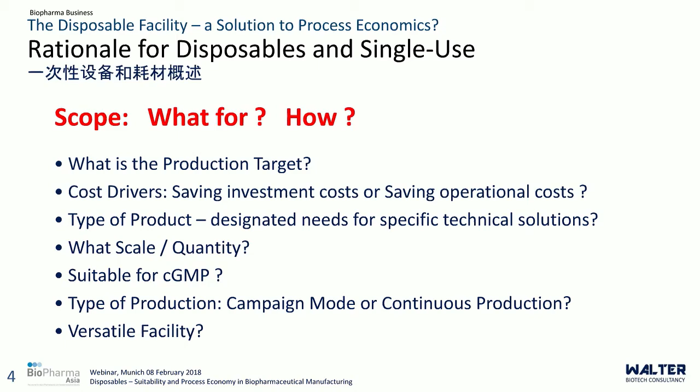This will trigger an important decision: what is the designated type of production? Shall the drug be produced in a campaign mode, or does the market volume require continuous production? Would the feasible and available scale of single-use technology allow manufacture of the requested quantity of product? Hence, is the target a versatile facility designed to allow a fast changeover from one product to the next, or is a factory of conventional style more appropriate?

Before entering the biopharmaceutical business, single-use technology was widely used in other industries already, for example in hospitals with respect to medical applications requiring comparable quality standards. So the technical premise was given from the beginning, but the general benefits from disposable single-use technologies had yet to become evident, namely in the conservative industry of pharma.

The driving force for the supply industry was the opportunity to conquer additional sites and new markets for biopharmaceutical operations, particularly cGMP campaign production of biopharmaceuticals for clinical phases. In the biopharma field, it refers to pilot plants where the advantage of single-use technology was explored, followed by companies and biotech startups which were limited in financial resources and skilled operators. This even includes universities and scientific institutions.

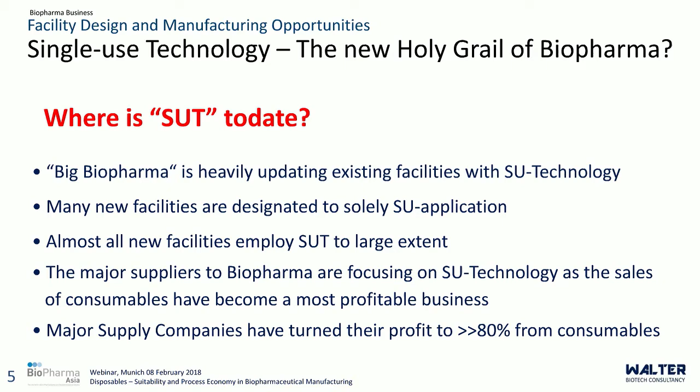The thorough evaluation of those questions is key to economy. The underutilization of a facility has a negative effect on the overall cost structure and can hardly be compensated. Such risk could be minimized with a flexible facility based on single-use technology applications, as fixed costs of a facility are very much related to size and scale. Thus, small facilities have the advantage of reduced fixed costs, for example investment, operation, and maintenance.

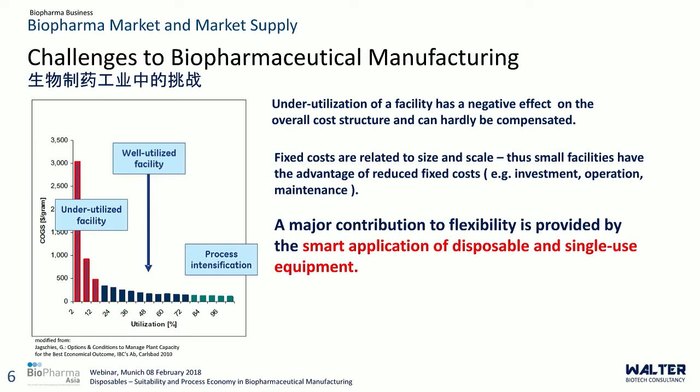This advantage, combined with improved flexibility, which should reflect the ease to adapt to new processes or operational requirements, should facilitate a reduced cost approach. A major contribution to such requested flexibility is provided by some smart applications of disposable and single-use equipment that we'll now come to.

Once a concept for the general operation of the facility in question has been established, the selection and choice of equipment has to be made.

Their footprint will define the required space, and most likely and preferably they are based on the intended manufacturing processes. How much and to what detail is the intended process defined? Which volumes need to be handled? How many tanks, containers of which volume are required? What scale of equipment to choose?

This may illustrate that in spite of process economy and commercial profit, a suitable development and design of a manufacturing process can only be as good as a management forecast for the product's market.

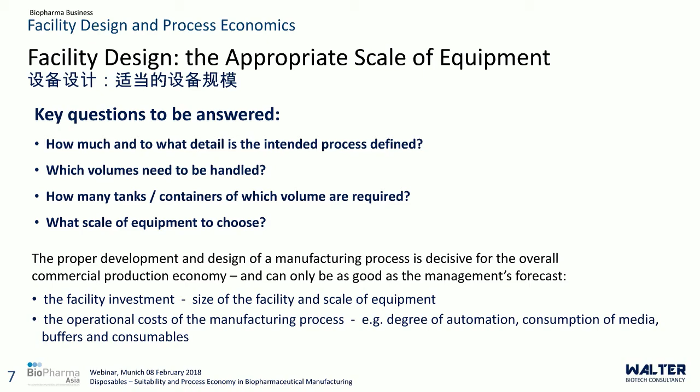After all, a tailored process design is finally decisive for the overall commercial production economy, and this with respect to both the facility investment, size of the facility and scale of equipment, and of course the operational cost of the manufacturing process. That means a degree of automation, consumption of media, buffers, and consumables.

The respective construction of a new facility for the manufacturing of a designated biopharmaceutical is not necessarily the typical situation. More typical, the intended process has to deal with an existing plant and shall fit to the existing space and equipment as much as possible.

To design and match a manufacturing process is certainly a challenge to process development, a challenge of different degree for different types of facilities. A conventional facility is typically a large facility with a majority of equipment and piping made of stainless steel.

The flexibility of such facility may be restricted, thus providing only limited options. That means due to concrete and stainless steel construction, such facility is at best reconfigurable. The processes to be operated are facility driven. That means process development has to consider from the beginning the options and the opportunities of the classic facility.

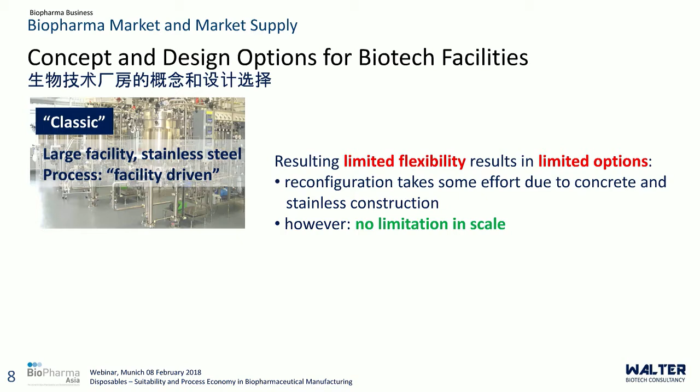Any deviation from the existing process equipment and or its configuration typically has to be supported by strong arguments, and this may lead to structurally engineered modifications which may even require a time-wise shutdown of the facility. However, to the benefit of a classical facility, there is, technically speaking, hardly any limitation in scale.

As a counterpart to the conventional facility, a flexible facility is a rather small facility, with its equipment and piping made of single-use disposable plastic polymers or in form of a hybrid plant configured in a combination of steel and plastic, where the individual parts can be replaced in a reasonable manner, thus providing superior flexibility.

The high flexibility provides nearly unlimited options. The plant will comply with variation of scale and scope of different projects and will be responsive to new challenges. Accordingly, the process is function-driven.

That means process development can focus on the target product, while the potentially required hardware and equipment can reasonably be acquired and installed. However, such facilities are limited in scale, as there are clear limitations for the respective single-use disposable equipment.

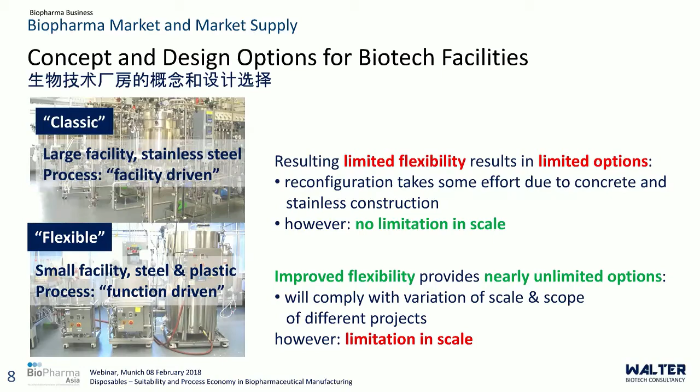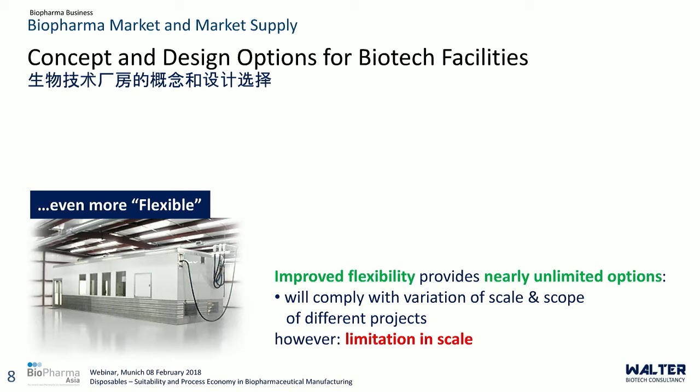The construction of low-budget containments, suitable to house and operate adequately disposables and single-use equipment, opened up biopharmaceutical manufacturing opportunities in areas and countries with limited infrastructure and engineering skills.

To date, the history of single-use technology applications is well established, and disposable consumables are available from many suppliers at fairly comparable quality. Their price has dropped due to increasing competition, though one needs to look apart from the mainstream supplier who are keen and still able to keep their high price level.

The art of single-use technology is a knowledge and experience-based ability to select disposable consumables according to the application's technical need, but not beyond. A good example may be the use of polymer bags for media and buffer preparation and storage.

The market offers, for example, sophisticated multi-layer bags with vapor barriers and single layer without vapor barriers. Both variants have their significance, and it is up to the user to decide on the appropriate application.

For example, if the medium or buffer will be consumed within a short time, thus making a vapor barrier obsolete, or if it is designated for storage.

The economy of single-use technology often suffers from a lack of detailed process cost analysis. That means missing economic analysis and cost comparison between both technologies. Therefore, again, a number of first questions have to be evaluated and answered.

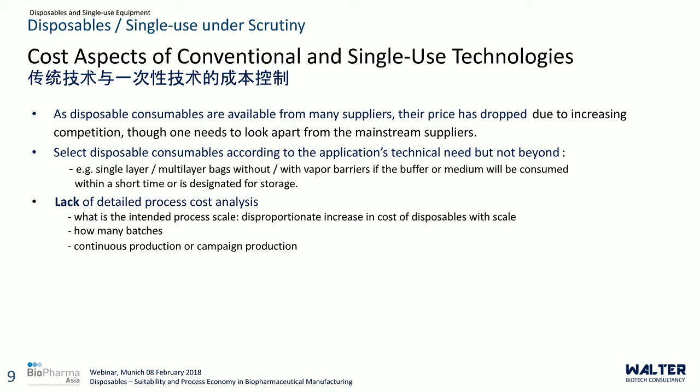Continuous production or campaign production. Is the turnover time in between change of product really time critical?

Missing economic analysis and cost comparison between both technologies. What are the real savings in initial investment? What are the cost savings in reduced cleaning validation? What are the costs related to testing of disposables for product compatibility?

Polymers are suspicious regarding leachables and extractables. Despite intense and thorough testing by the supplier, the individual process solutions need to be tested accordingly, raising the question of what are the costs related to testing of disposables for product compatibility.

A significant economic risk is underestimating the cost of long-term dependency on consumables once the decision has been made to solely rely on disposables and single-use technology. The selection of single-use technology shall be performed in an extremely thorough manner. Neglecting the dependence on a single supplier once single-use equipment has been purchased definitely can be fatal.

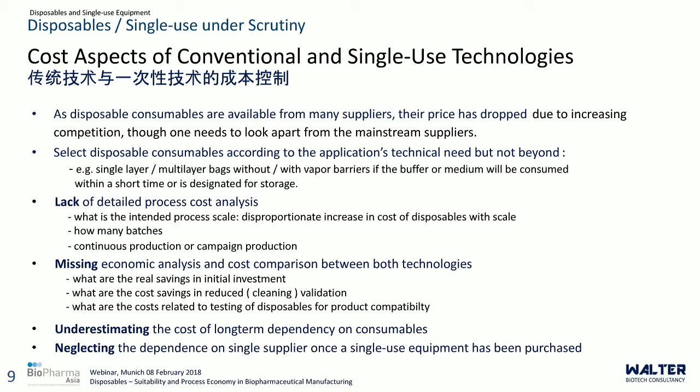So now we come to the disposables and single-use equipment to be used in downstream processing. The last but not least aspect with respect to a responsible application of disposables and single-use technology is the management of the resulting tremendous amount of waste.

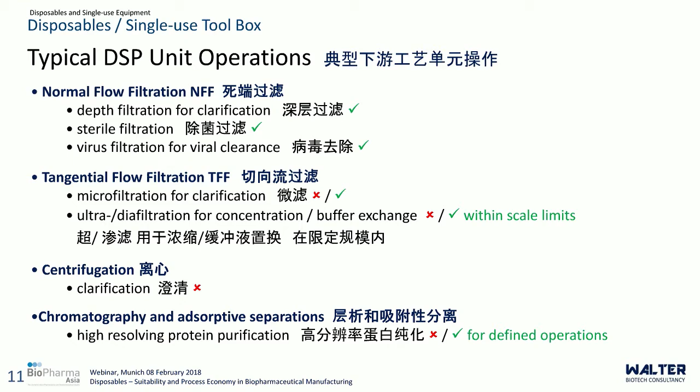That is what we have to deal with. So the typical downstream unit operations include normal flow filtration, depth filtration, sterile filtration, virus filtration for viral clearance, all that is used since long time. Tangential flow filtration, maybe within scale limits. Centrifugation, maybe not the first choice for disposables. Chromatography and adsorptive separations become more and more possible.

But back to the environmental impact of single-use and the waste management. This daunting mess justifies a fundamental concern for the wide use of disposables and single-use equipment with respect to the potential impact on the environment. While with conventional stainless steel hardware the environmental impact is due to the large volume of aggressive fluids for cleaning, the major impact by single-use technology is solid waste of polymer consumables.

Other solid waste, such as packaging, paper, cartonnage, and disposable and single-use items like garments, gloves, and so forth, remain the same for both technologies. However, with single-use technology, the saving from fluid waste is only related to cleaning agents. The other process fluids, including sodium hydroxide, for example, for sanitization of manually assembled tubing, membranes, filters, and chromatography columns, resins, remain the same as they are an integral part of the downstream processing per se.

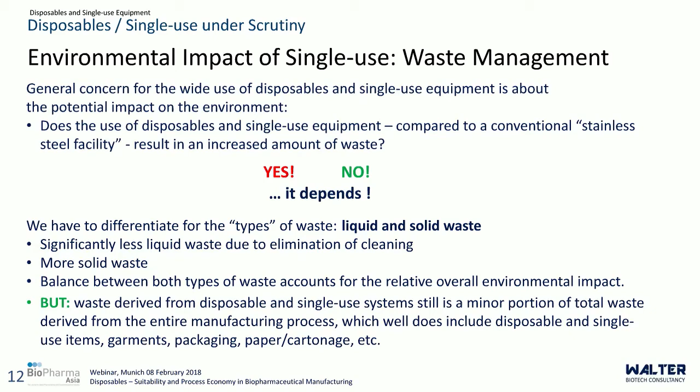The benefit of reduced cleaning fluid and saving from cleaning validation may even further be cannibalized when using hybrid equipment, for example, in chromatography and tangential flow filtration operations. These circumstances should seriously be considered once a cleaning validation argument is used against conventional stainless steel equipment in favor of single-use technology. Accordingly, the environmental impact of conventional technology and single-use technology is largely comparable.

The benefits of single-use technology regarding cleaning fluids are minor regarding environmental impact and only major regarding respective single-use technology marketing by the suppliers. The significant energy consumption in the manufacture of disposables is hardly argued, though this serious negative balance draws a dark shade on single-use technology and may put single-use technology inferior to environmental protection compared to conventional technology. After all, the environmental burden is just translocated from the customer to the single-use supplier.

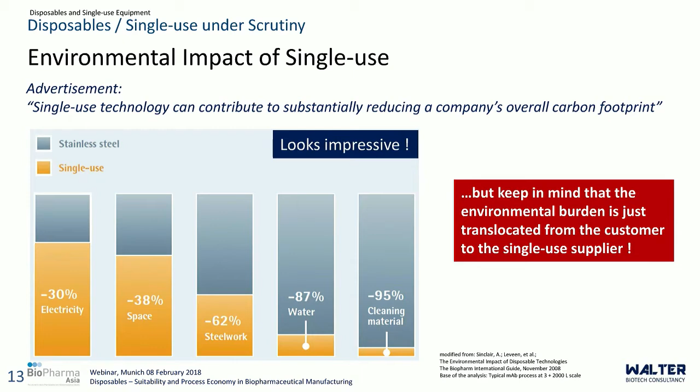The use of polymer bags for media and buffer preparation and storage is with no doubt the most widely spread application of disposables in biopharmaceutical processes, and it is probably the best example to demonstrate the advantages of single-use technologies.

We can achieve an optimized buffer makeup schedule. Buffer preparation becomes feasible at times of low process activities. Buffer makeup ahead of time for several batches. Buffer aliquots of appropriate volume for designated unit operations, and beneficial logistics during the production process itself.

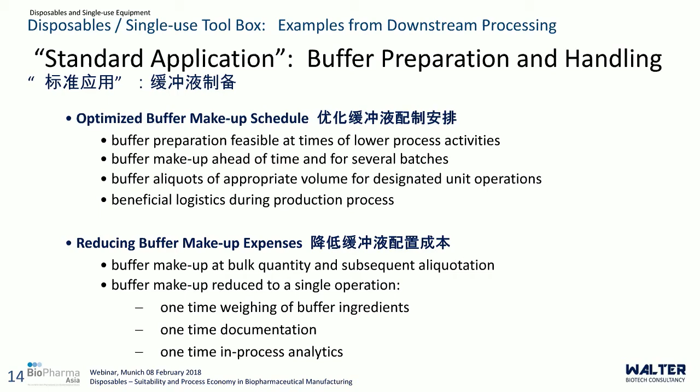And it will help to reduce buffer makeup expenses. Buffer makeup at bulk quantity and subsequent aliquotation. Buffer makeup is reduced to a single operation: one-time weighing of buffer ingredients, one-time documentation, one-time in-process analytics. And it may help to improve process safety and robustness. Filter capsules, bags, sterile connectors, and filter transfer steps are available for safe handling.

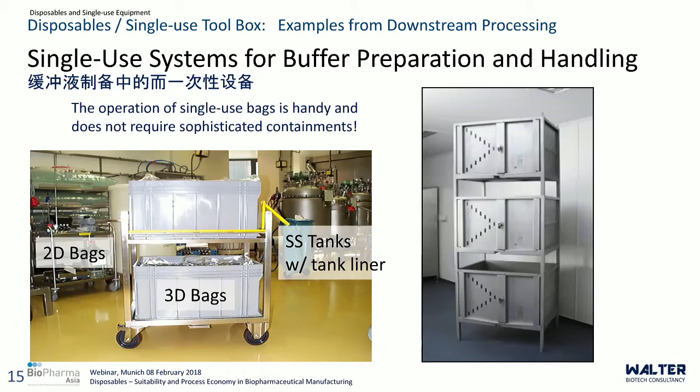A most discussed deficit of single-use technology is process chromatography. But first, let's have a look to what is available here from the bags. There are liners which can be used with stainless steel tanks, two-dimensional bags, or three-dimensional bags. It looks nice, it looks neat. However, we have to be aware that the containers definitely are a question.

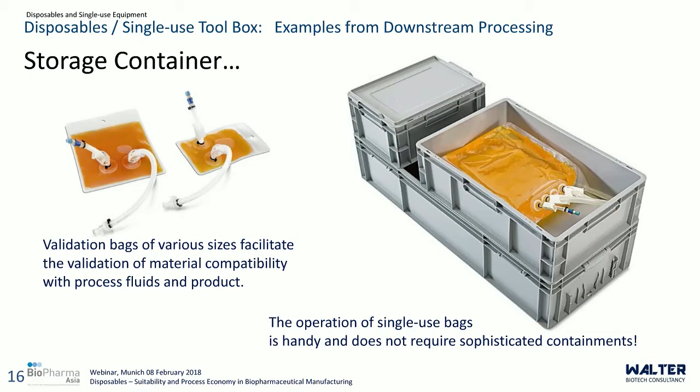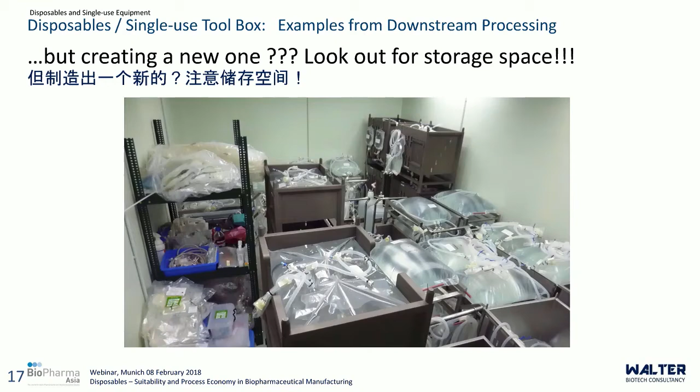The good thing is that regarding storage containers, there are little validation bags typically available where material compatibility with process fluids and product can easily be measured. However, creating space, we have to look for storage space, because finally all these bags, all these containers easily can end up in a mess if there is not appropriate storage space available.

The most discussed deficit in single-use technology is a single-use approach to process chromatography. Technically, the chromatographic hardware, that means piping, tubing, inline sensors, columns, are not considered in general as critical components per se for single-use applications. Economically, however, the asking price for those is yet another question. Ostensibly, the price per liter of matrix seems to be the prominent cost factor for chromatography and is assumed to be the typical cost driver of a chromatographic unit operation.

For example, affinity chromatography using protein A matrices for the purification of antibodies. But is this really true? The answer to this is quite ambivalent. It depends. Firsthand, it seems to be the price for the investment into a chromatographic resin for the purpose of single use only.

Numerous young and innovative companies in Europe as well as in Asia have developed new and alternative products which can help significantly reduce the cost of goods, providing an interesting basis for single-use applications. Despite this, in case of chromatographic applications, the term single-use may be altered somewhat. A fair pragmatic approach is a single use of resin for an entire fermentation batch, such that the chromatographic operation is confined to typically 3 to 5 cycles, depending on the feasible time schedule of the facility. This will not only significantly save chromatographic resin, but also allows the use of much smaller process equipment, for example column and chromatography system, with the benefit of reduced footprint and additionally saving investment costs in hardware. After all, taking into account reasonable scales and suitable manufacturing targets, the doors have been opened widely due to the supply of appropriate low-cost matrices and feasible hardware.

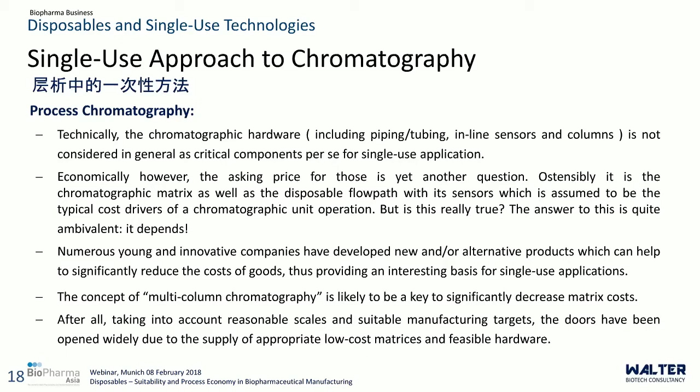One example is shown here. It's a system built in China, very nicely made with high-quality sensors, equipment from Europe, from the US. It's providing a flow path in stainless steel, as well as the opportunity to add on disposable flow path, using the identical sensors, using the identical equipment, the hardware. So that means dropping the price drastically, because there's no need to get a system either or, but to have a convertible system, which allows both conventional and disposable flow path.

Definitely this is the way to go, especially in pilot facilities where there's always a question what to do. Shall I go conventional? Shall I go disposable? So solutions like that are available on the market, one just has to look for them.

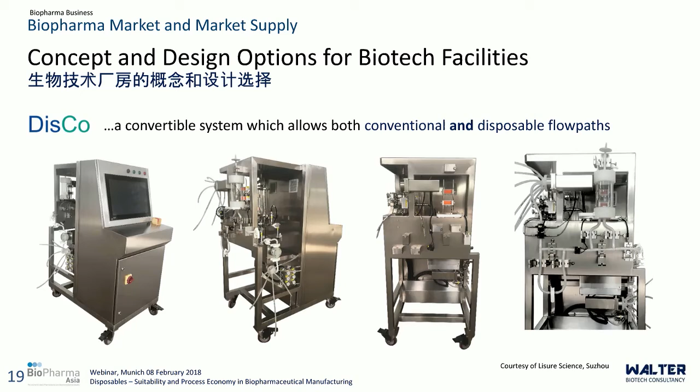Similar considerations apply to pricing of high-priced resins in general, for example expensive mixed-mode media or high-resolving uniform beads. The price concern for most other chromatography resins, like ion exchange and hydrophobic interaction chromatography, is less dramatic than it is, for example, for protein A matrices. But anyway, the purchasing price per liter of matrix is not the sole cost factor for the economy of a chromatographic operation. Additional process-related cost factors have to be investigated in depth and evaluated before or latest during process development.

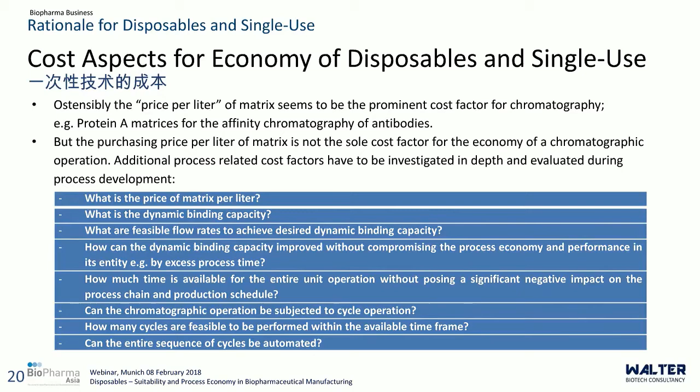What is the price of matrix per liter? What is the dynamic binding capacity? What are feasible flow rates to achieve desired dynamic binding capacity? How can the dynamic binding capacity be improved without compromising the process economy and performance in its entirety, for example by excess process time? How much time is available for the entire unit operation without posing significant negative impact on the process chain and production schedule? Can the chromatographic operation be subjected to cycle operation? How many cycles are feasible to be performed within the available time frame? Can the entire sequence of cycles be automated?

Typical beaded matrices are diffusion limited. That means the carrier fluid and the target molecules have to diffuse into the pores of the resin and out again upon elution. Some chromatographic matrices feature a matrix pore design which allows some convective flow within the bead. Accordingly, their dynamic binding capacity is somewhat less dependent on the applied flow rate.

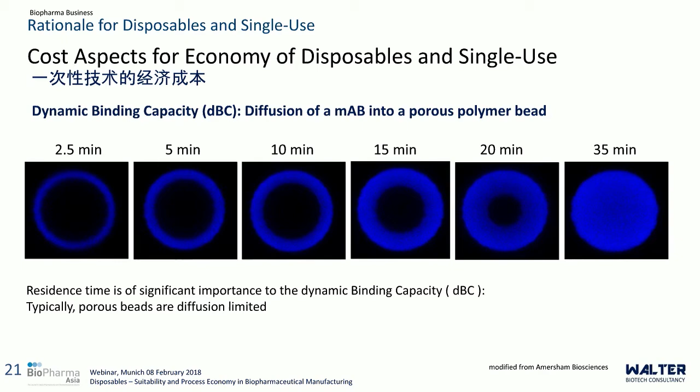Nevertheless, the dynamic binding capacity has to be evaluated in each case, individually for the target molecule and the applicable feasible flow rate. As such, the binding capacities, as advertised by the respective resin manufacturers, always should be treated with care, as the data typically reflect very optimistic conditions. The feasible reality for the own product may be quite different.

It is common that different products show different dynamic binding capacities at comparable physical conditions. Accordingly, the screening of different resins from different manufacturers is worth the effort, particularly with regard to single-use applications where a reduced resin volume can save substantial investment.

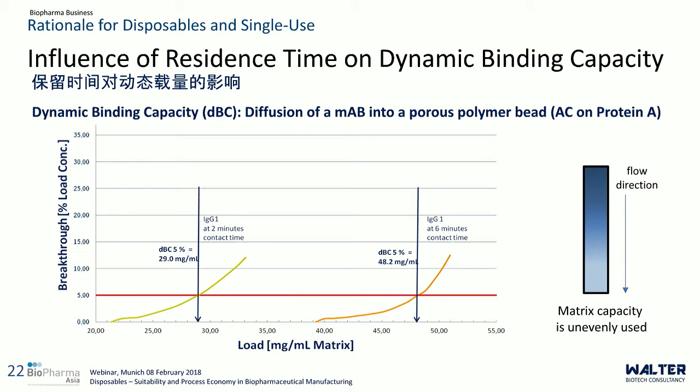And if we consider the price range for a comparable protein A matrix, from about $6,000 to sometimes up to $18,000, it's a tremendous investment which needs to be made, ranging from $500,000 to $1.5 million, or $300,000 to almost $1 million, at, let's say, the typical large target of about 30 grams per liter or 30 milligrams per milliliter.

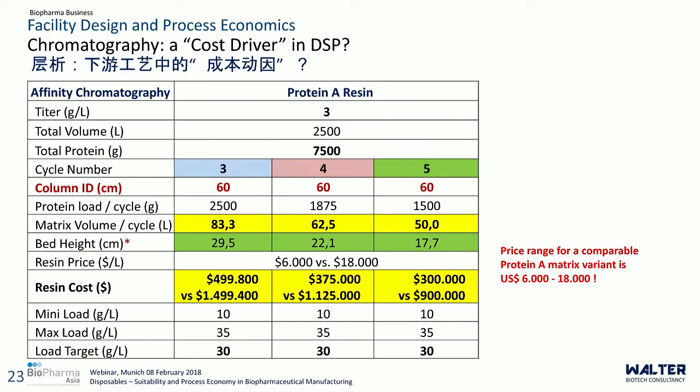How can we come clear here with disposable or single-use chromatography? A revolution was last year's change of the FDA's policy, now very much supporting their approach, and the support by the US FDA for application of continuous processing in biopharma, which helped dramatically to enforce this in the pharma industry already. Continuous processing is nothing new.

Many other industries do this for years, for decades already, but for biopharma it's considered quite new. But it definitely has some tremendous advantages when it comes to chromatography. It has specifically become interesting for process chromatography, now often referred to as continuous chromatography, which unfortunately, or of course, is a wrong and misleading term. It is continuous processing using designated chromatography systems, while the individual chromatographic separations follow the traditional principle of equilibration, load, wash, elution, and regeneration, and this in fact is not continuous.

Despite the nomenclature, the principle of using sequential columns is quite attractive. Any product which passes unbound a first column is recovered by the subsequent column. Accordingly, the breakthrough of product is no longer a serious concern, and while it allows applying high flow rates, it additionally increases the dynamic binding capacity significantly.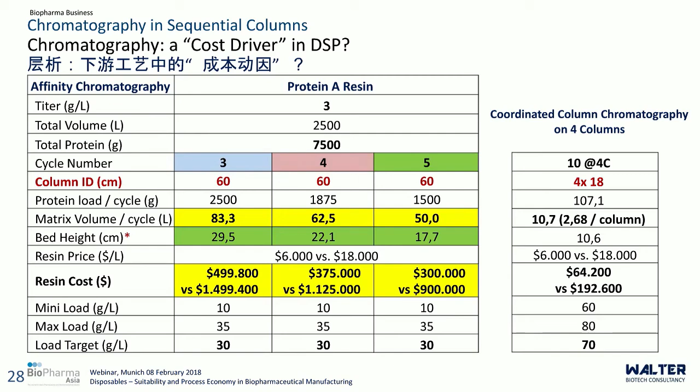Nevertheless, the matrix has to be cleaned between cycles. And although expensive protein A matrices are advertised as sodium hydroxide tolerant, at least for 15 minutes exposure at 0.1 molar sodium hydroxide, these photos clearly show that effective regeneration will require almost 1 to 3 hours when treating the matrix with 0.1 molar sodium hydroxide.

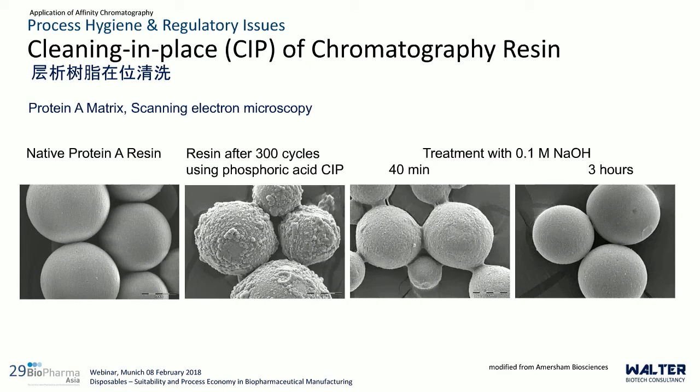If we look at a so-called sodium hydroxide sensitive protein A resin, an old-fashioned resin, and consider single-use chromatography at a 2500 liter scale with about 7.5 kilograms of antibody, we can see that even beyond 20 cycles we have very good stability, despite the fact that this matrix is not sodium hydroxide tolerant. If we increase the cycle number of the coordinated column chromatography using 4 columns up to 20 cycles, the cost of that matrix is down to something like $20,000 only, compared to $400,000 to more than $1 million in conventional processing.

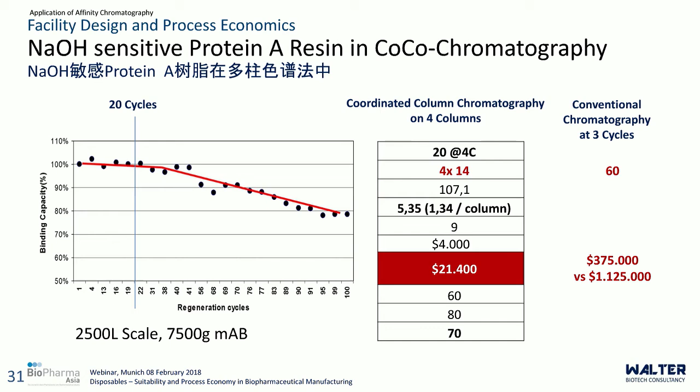That means the former cost driver, protein A, can become less expensive than other downstream processing unit operations, like virus filtration for example. And then it becomes quite feasible.

So to conclude and summarize this: disposable consumables are available from many suppliers, therefore price competition can be in favor of the user. However, due to lacking standards of intercompatibility of single-use consumables, often is a commercial key property of single-use technology its design.

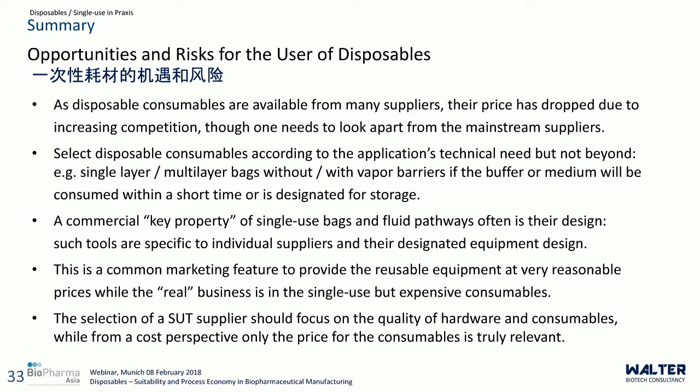Such equipment is specific to individual suppliers and their designated equipment design. This enforces a common marketing feature, namely to provide the reusable equipment at very reasonable prices, while the real profitable business is in the follow-up business of single-use but expensive consumables. Tied to the respective hardware, the user has pretty limited options when negotiating the purchase of required consumables. So one definitely has to be very careful what to use, but if used the right way, it can be very much of advantage and of economical benefit.